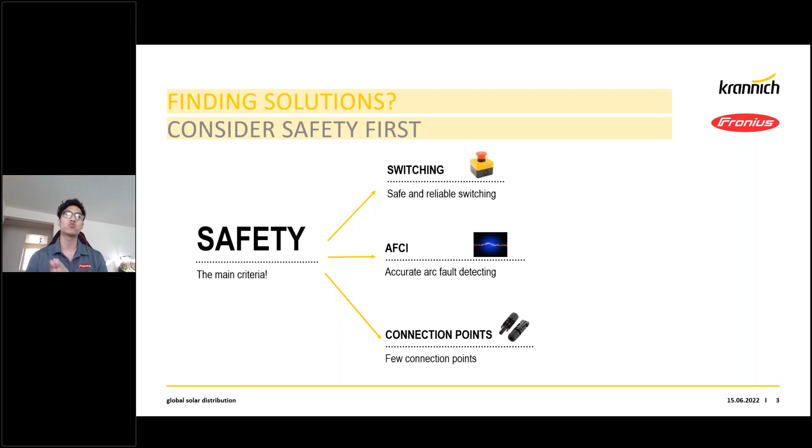So with the first criteria, we want to address safe and reliable switching, and the main reason why we want to address this is because NEC 2017 and 2014 had brought rapid shutdown to our systems. And with rapid shutdown, what we need to understand is that there's a lot of switching on and off that's occurring, right? And why do we need to take a look at this? Well, the main reason for rapid shutdown when it was implemented was in case of emergencies, a quick, efficient, and safe way to de-energize a PV rooftop, right? So why are we bringing this up?

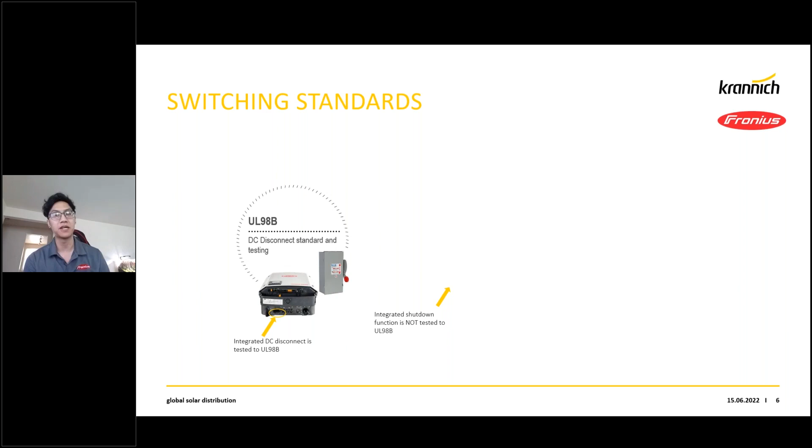Switching standards. Here at Fronius, we offer a string inverter, and all of our string inverters come standard with a DC disconnect at the bottom of it. This DC disconnect is also tested to a switching standard, the UL98B. This standard requires us to actually run that DC disconnect switch under hundreds of thousands of iterations to ensure that it functions as it should and never fails. Now, this is on our inverters that do standard DC disconnects.

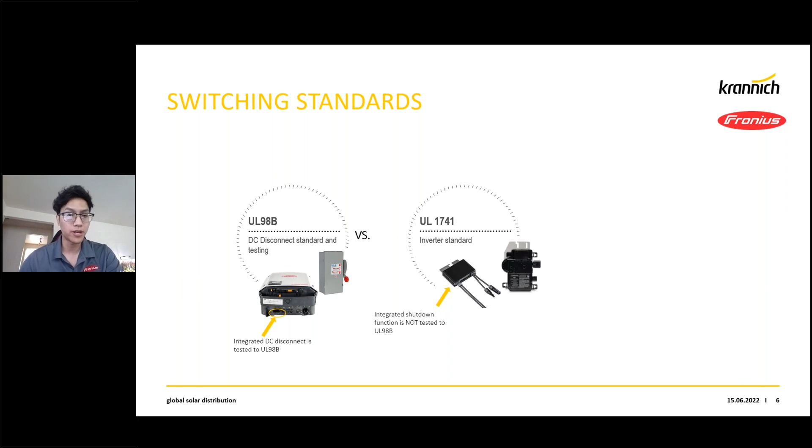However, when we start taking a look at other options within the solar market, such as module level power electronics, what we're seeing is that they're starting to do the same thing, right? In this case, module level power electronics on a rooftop is acting like a switch. However, when we actually take a look at the device that's starting to act like a switch and starting to act as a rapid shutdown device, these devices have solid state switches installed inside of them in order to do this switching. The problem with that is these switches on the module level power electronics devices are not tested to UL98B. They are not tested to these extreme conditions in which a standard DC disconnect switch would be tested in high temperatures, extreme temperatures.

So the biggest concern that we're trying to bring up here is we're starting to see within the solar market an influx of MLPE devices being installed on top of rooftops. However, they are also now being forced to be utilized as a switch for rapid shutdown. However, this rapid shutdown function is not being tested under UL 98B, so it is ultimately a large concern where we have unfair standards being put across multiple products that do similar functions. However, one product is no longer being required to UL 98B. So this is something that we often keep in mind when we're taking a look at switching. A switch that needs to function as is, but isn't being tested to standard switching requirements. It is something that we should be bringing up with our utilities and AHJs.

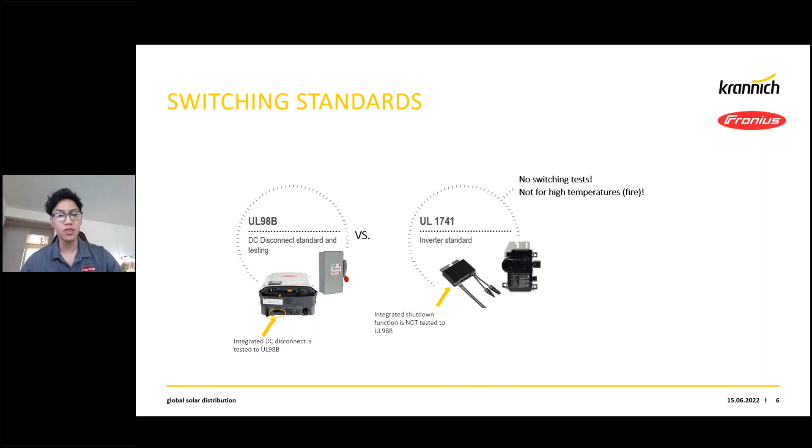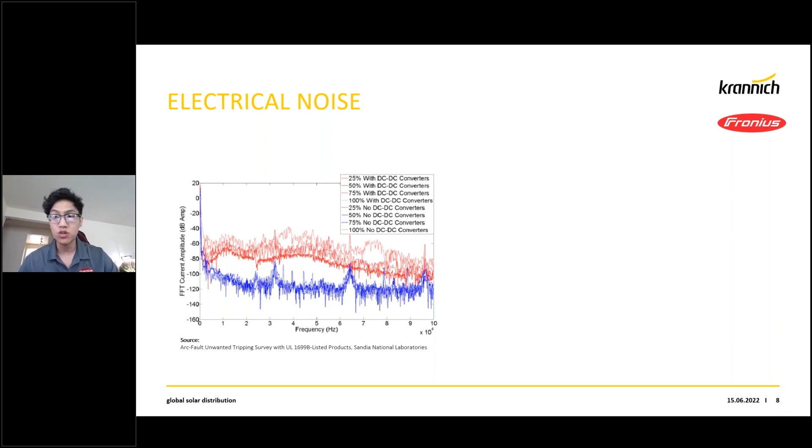But what happens when we start adding more people to either ends of this tunnel and they all start having conversations? What we're going to see is a lot of noise. It becomes a lot more difficult to have a conversation with the person you're trying to at the end of the tunnel. And the same thing occurs within our DC lines. Now, when module level power electronics is implemented onto the DC line of any PV system, what we're going to see is a lot of noise that's being introduced onto the DC line.

If you take a look at this graph, the blue line that's going across, relatively low compared to the red line, is actually your DC line coming in, minimal noise, and it's quite stable. But once you start introducing module level power electronics or DC to DC converters onto the rooftop, what we're seeing is a large shift in this signature that's coming through.

Now, what do we know about arc fault and its detection? Well, arc fault uses a bunch of algorithms and predetermined arc signatures. So if we have a predetermined arc signature and ranges within that, as we start adding module level power electronics, we start pushing this DC signal out of its standard operating ranges. And so what we can experience is, again, nuisance tripping, unreliable detection, and possibly false keep alive signals. And all of these factors add to the risk of safety within a PV system.

So whenever we take a look at options out on the market currently, we want to ensure that the inverter first and foremost has AFCI algorithms, that it's not something that you can turn off and just hide away with, because it's implemented for a reason of safety. And in order to keep it as safe as possible, we need to start thinking about this DC line and the noise that's being introduced, and if this is going to cause a lot of problems down the line of owning a PV system.

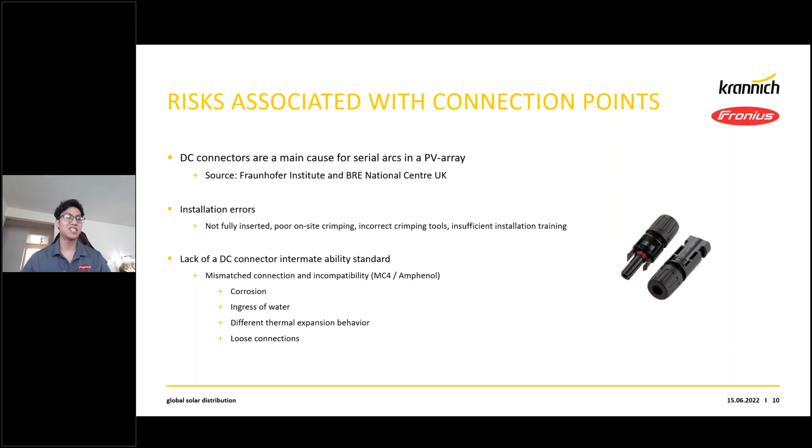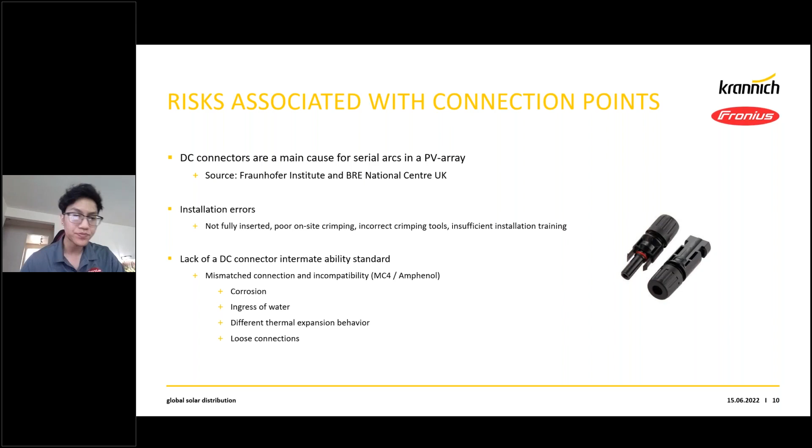Sure, you can essentially put these two parts together, but is it the best and safest? They found that every single time anyone was involved in a DC connector or a connection point in general, that this was an area for failure. So the biggest concern with the market currently is the injection of module level power electronics and the increase in number of connection points that's associated with the installation of module level power electronics.

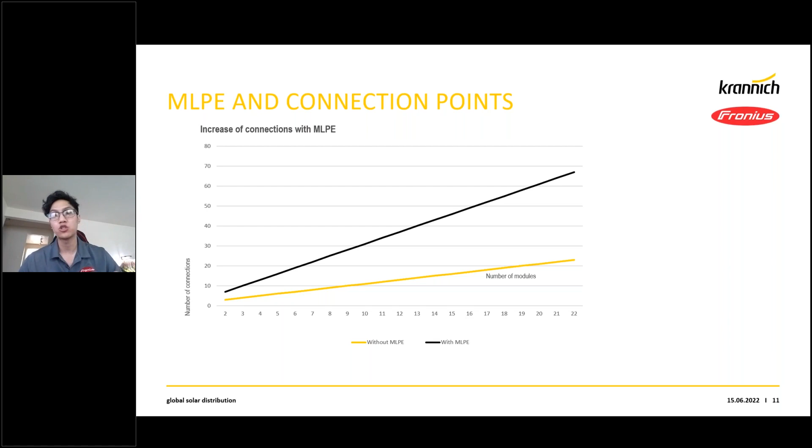This graph here shows that as we install module level power electronics, the number of connections that we introduce to a system changes by nearly a 2 to 3 fold factor. And with that being said, every one of those newly introduced connection points are now going to be an area where you have to ensure it is installed properly, and again can possibly become an area of risk for arcing.

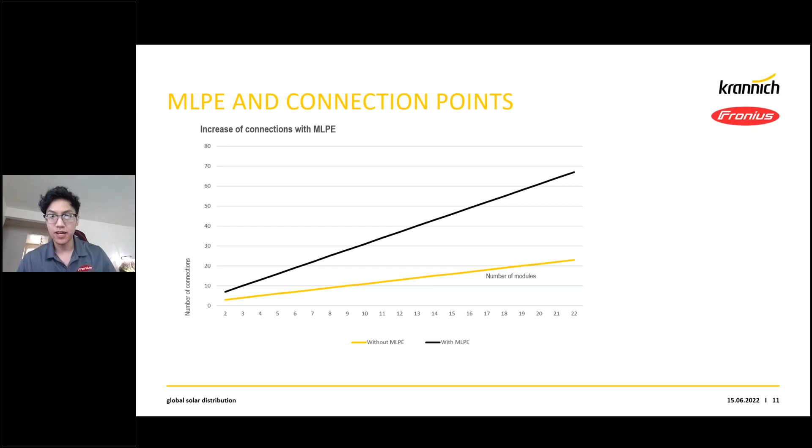All right, so hopefully the 3 different criteria, I know that they're not generally points of safety that people are concerned with, but here at Fronius, we like to take all points of safety into consideration. And one of the main things about safety that we have under our control is our products, and what can we implement into our products to ensure that our products are as safe as possible. So again, these are a few extra criteria that we wanted to take a look at today and really just

let you guys know. Again, switching, safe and reliable switching is a must-have, and we need to start questioning why module level power electronics is not being required to be tested to the same UL standard, right? UL 98B, the switching standard. Why aren't module level power electronics being tested to this?

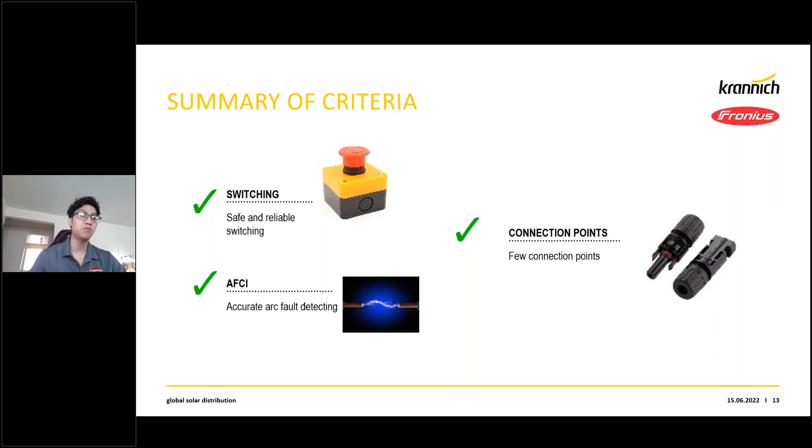AFCI, we want to make sure that they are accurate and that we don't implement any devices that cause possible problems to this. And finally, number of connection points. What we learned today was if we can reduce the number of connection points in any PV system, we can improve the longevity and the reliability of any PV system down its lifetime.

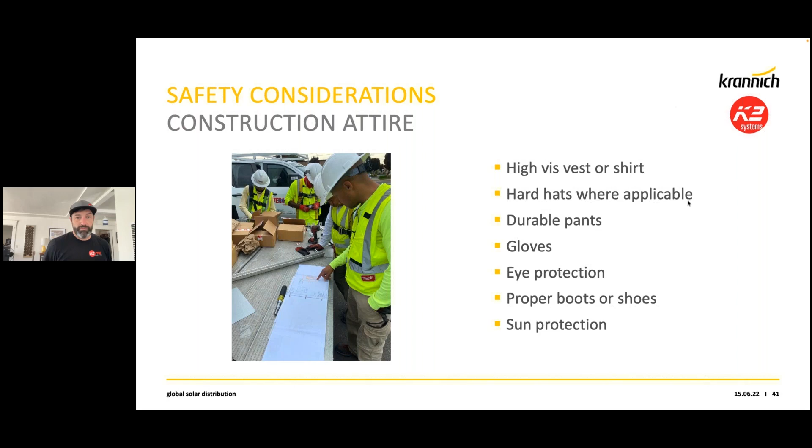So, and then you go to residential jobs and you see that some installers are not following any of this stuff. So it's good to have this. There's a good example right there, a crew I was with in Washington where they were on a government project and they had to have all these things.

A lot of installers ask about what kind of footwear. Some use skater shoes or Vans, but obviously you want to use boots, but sometimes you want to be more nimble. I found some installers are using these Cougar Paws. They're actually pretty interesting products. It's a great boot. It's flexible, it breaks in. Some of them have steel toe if you want that. And then they have this pad on the bottom that you can actually remove and replace. That is kind of like a pad that sticks really well to asphalt shingle and sometimes tile as well.

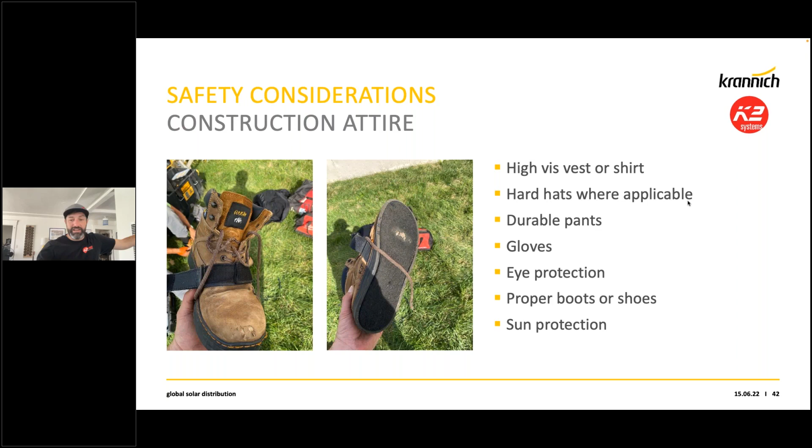And then if you're on metal roofs, obviously you want to have stickier shoes so you're not sliding around. And if there's any water or snow on the roof, you definitely want to brush that off and let it dry out, because that can just really make a metal roof really slick.

Ladder safety, this is a big one. And we're trainers, so we go to all kinds of jobs and sometimes the ladders are already set up. So I always tell our whole training crew, check out the ladder before. If you didn't set it up, definitely inspect it before you step foot or even touch that ladder at all.

So you want to make sure that you're standing, see, I don't know if you could see my camera, but if you put your feet at the feet of the ladder, you should be able to stand and hold it there so that that angle is proper. It's not overly bent over, so you're not reaching for it, and it's not a super hard slope where it's right close to your chest. You want to have a nice, perfect angle to it. So basically, if you put your feet at the feet of the ladder and reach out, and it's there comfortably like a steering wheel, then you're good to go.

And then you want 3 points of contact, but a really important thing is having the ladder be secured. A lot of times installers will take a bracket, a C-channel bracket, and a strap and strap it to the underside of the rafter on the bay underneath. You can't see, but a lot of times they do that. Or if you're doing a penetration and you're putting your fall protection, sometimes they'll put fall protection right at the ladder so that you hook in and you go up the ladder and you're safe.

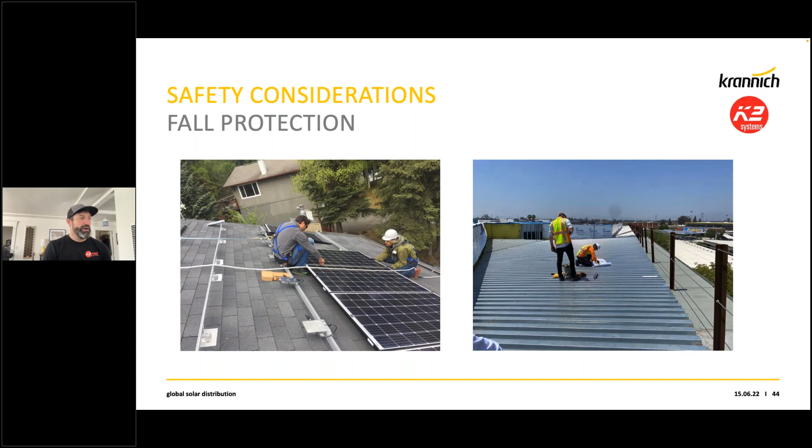They got it done, but I've seen crews use these ladder lifts that are really, really helpful. And it might take some time to set up because you have to have a little mini generator and it powers it up. But once you have that, you can have an installer on the ground prepping modules, setting them up, sending them up, and then the installers on the top can take them, install them. He can bring it back down with the control. He can bring up mounts, tools, everything, so that you don't have things falling off the roof.

And going back to this intro picture real quick, setting a perimeter is really, really important. And a lot of installers laugh at hard hats because sometimes you're on the roof, but when you're on the ground, you should be wearing a hard hat and you should set a perimeter so that homeowners or their kids are not running in that section.

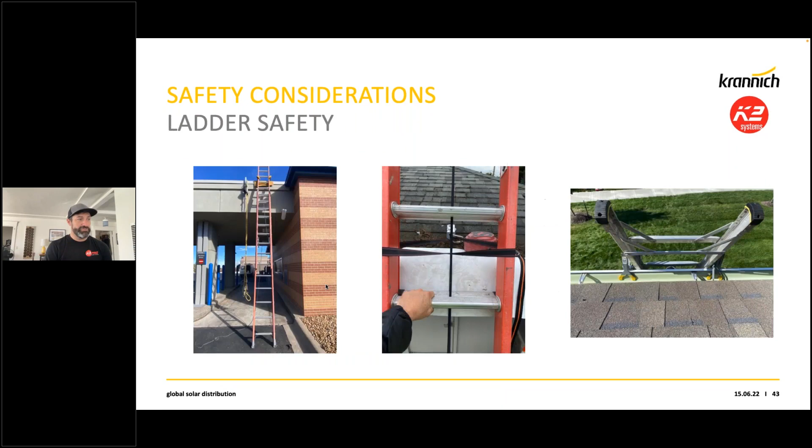That is a construction zone and nobody should be in there, so that things don't fall on them and there could be an issue. And that's where they should be wearing hard hats. So the installer below here is loading everything up, has a hard hat on actually. So this is just a brief overview of some safety things that we talk about in our new K2 Pro partnership training program that we have.

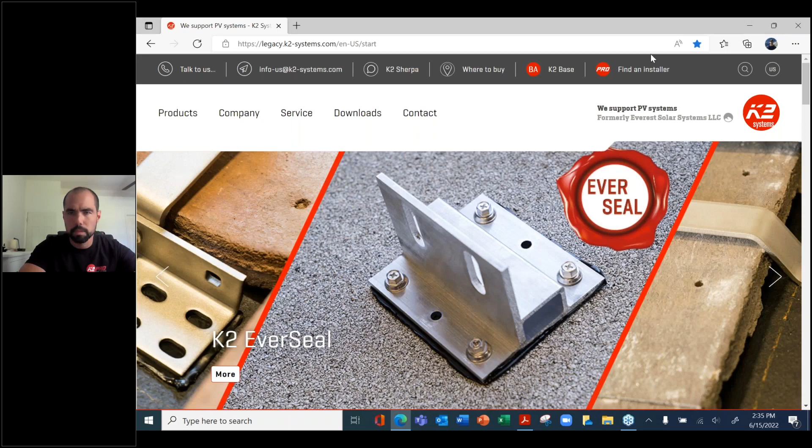So give me a second here. Okay. So let's see. Sorry, give me a second, Drew. Sorry. Pull it over to you. Yeah, all good. All right, make presenter, there you go. All right, you should have controls. It might take a minute there. Let's see, is that working now? Yeah, we can see your screen.

All right. Yeah, so I'm Drew, like Johan said in the introduction here. I'm a technical trainer for K2, come from an install background, been leading crews for 8 years before coming to K2. And just wanted to go through our solar design tool, online design tool.

So first things first, go to the homepage here, it's just k2-systems.com. And then if you look through here to service, you can find our online design tool underneath our Basecamp Education Center there. Click on that, brings you to a web page with some tips, cheat sheets, some information on how to use the tool. If you scroll down, there's also a video of Gal Roeder. He's the K2 Base product manager, giving a couple updates and improvements on the system.

So if you're at this page, you can start Base from this button here. But also, if you look at the header of our website here, there's just a quick link to get to K2 Base. All right, so now that I'm here, I'm already signed in automatically. That's me right there. So you're going to want to log in or sign up so that you can save your projects here. And when I start Base, it brings me to this dashboard with all my latest projects.

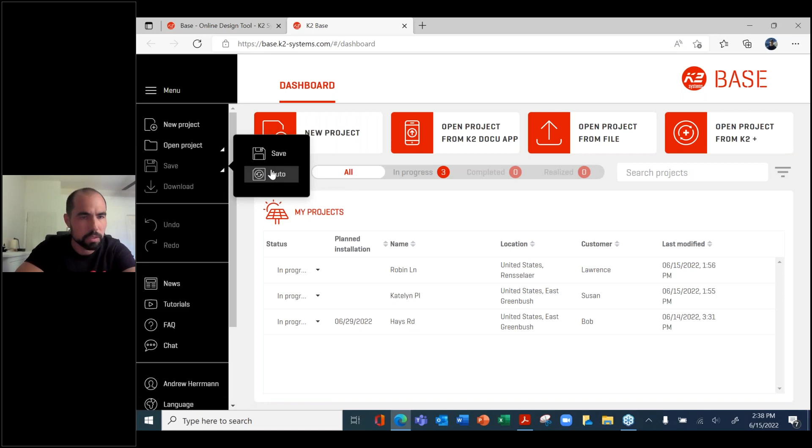You can download the project after you're completed here, or at any time really, to your computer. You have an undo, redo button, which is nice if you make any mistakes. Some news from K2, YouTube tutorials on how to use the design tool, and FAQ. And if your question isn't answered in this FAQ, you can go to our chat here, and you can use either WhatsApp or, if you have an iPhone, iMessage, to talk directly to our tech sales department, and they'll get back to you. And yeah, so let's get into it.

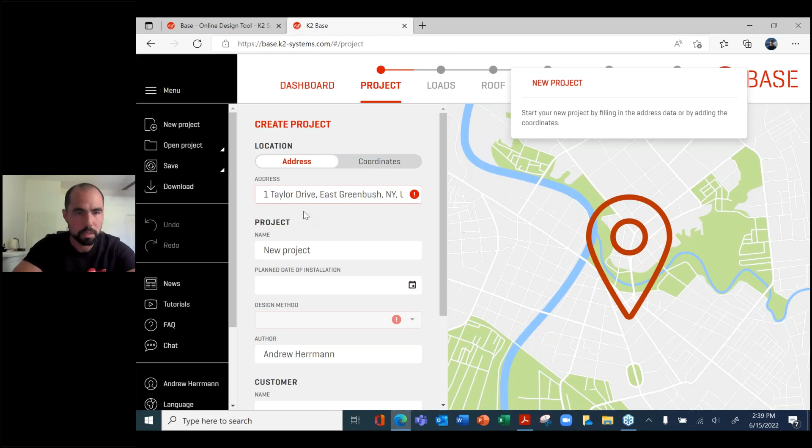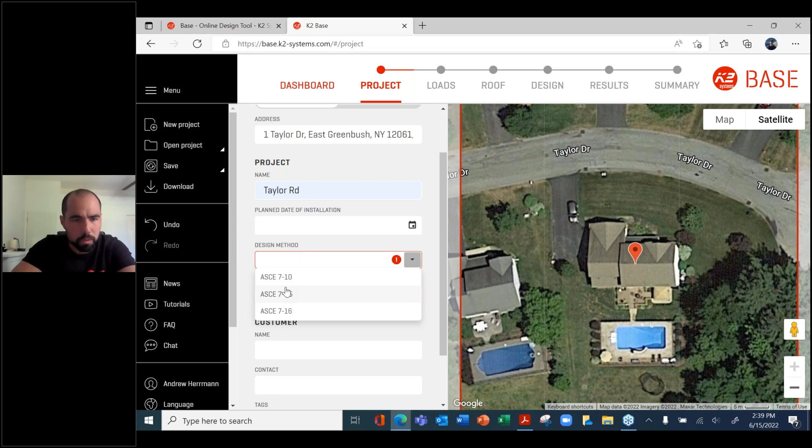Let's start a new project. I'm gonna choose something up by me here, up in the Northeast, upstate New York. All right, so there's my house. And let's name this just Taylor, yeah. You can choose a planned date of installation, but that doesn't matter for you to continue on to the other sections. The design method does matter. If your AHJ is using older minimum design loads, you can choose whatever your AHJ is using, 7-05, 7-10, or you can use the updated 7-16.

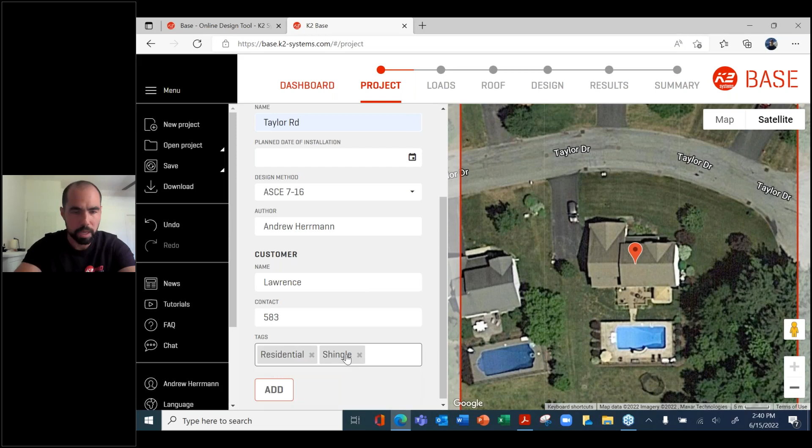Let's name this customer as Lawrence, and let's give him contact information, whatever you want to do. You can put a phone number in there. You can also tag this project with different tags, so when you're searching, you can actually pull it up by the tags. Let's say it's a shingle project, hit enter, and that'll add a new tag.

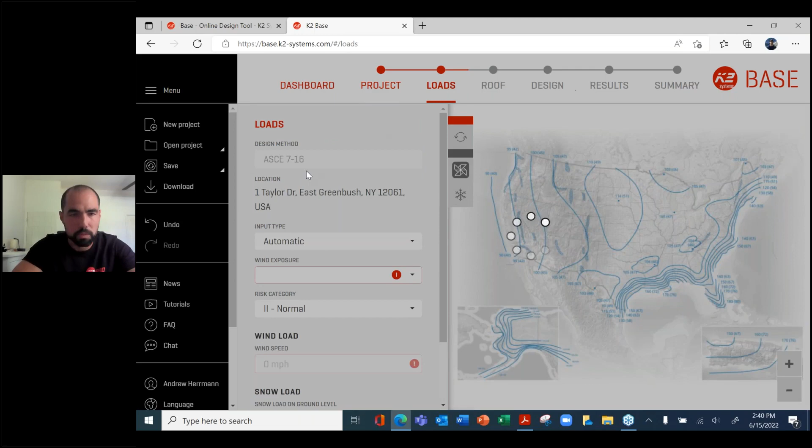So this is our new project we just added, and now we're going to go through the design requirements here. So if you choose that 7-16, it can automatically input your snow and wind loads for the region you're working in. Up in the Northeast here, we have 110 mile per hour wind, 40 PSF snow load, but you could also input that manually if you wanted to. The wind exposure is going to be urban, suburban, and risk category normal.

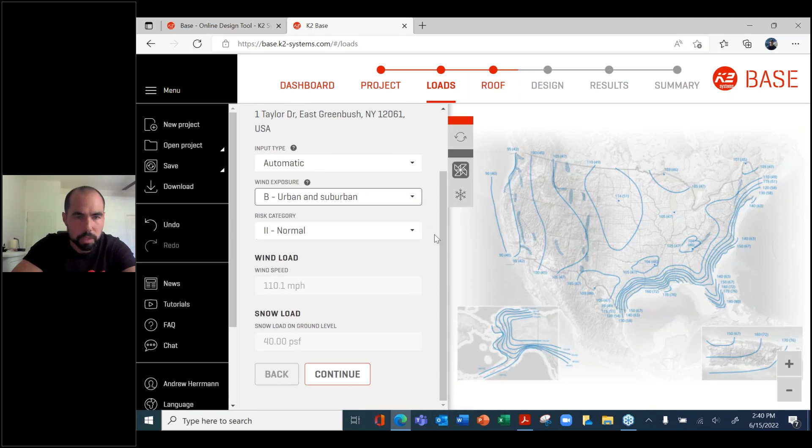I'm going to go through this pretty quick here, just so we have time for questions at the end, but also just to show you guys how easy this design tool is. So this is a gabled roof, and with that option, you have the option to draw a rectangular array. If it's a hip roof, you have a couple of different options to choose from. This is gable, we'll go rectangular.

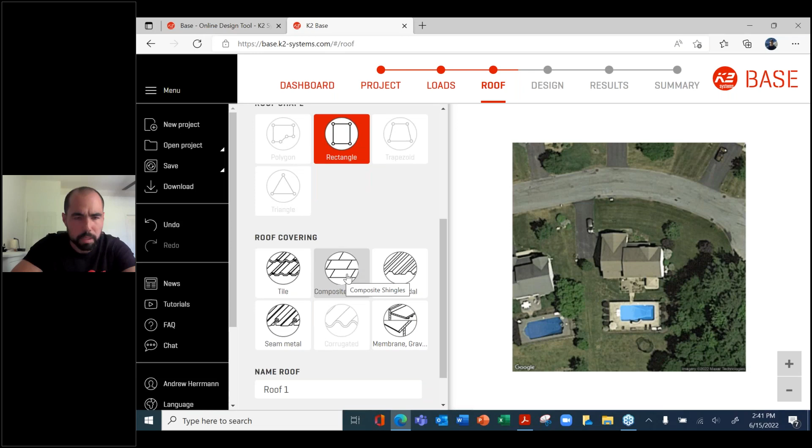It's a composite shingle roof covering, and this is important too. What's nice about this is it limits our product selection in the next sections of the design tool, so that you're not having to sift through our entire product list. And we'll just name this roof 1. So then when you click add, you will draw out the roof you want to attach your solar array.

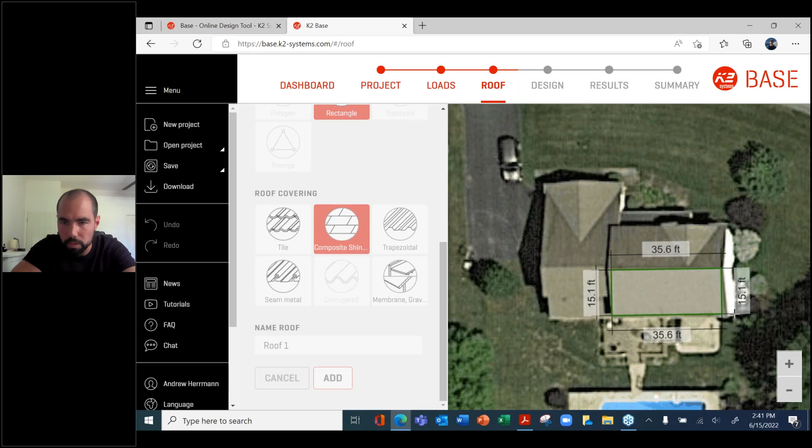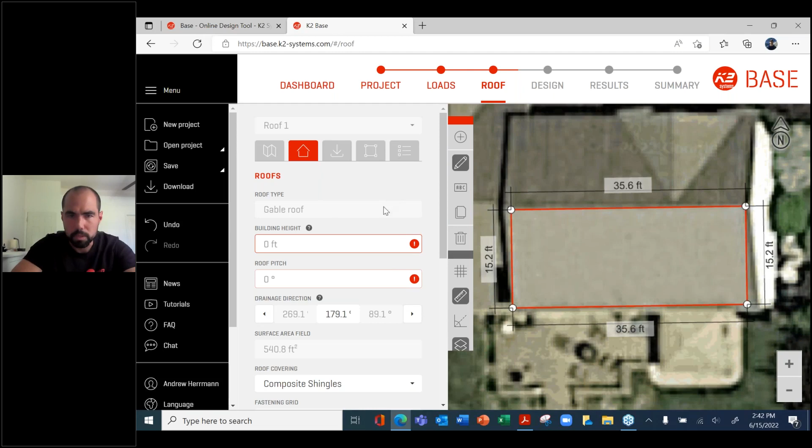So I'm just going to go from the peak here, peak to peak, and create a nice rectangle for our array. Looks like that's pretty close to the bottom of the roof. Okay, and some of this information you'll want to get from a site assessment, but we also have the option to do a street view, and you can kind of see how tall the building is and what the pitch of the roof is. But this, we'll just say it's a 2-story, so it's going to be about 25 feet. Not the biggest pitch, pretty low slope, 20 degree pitch.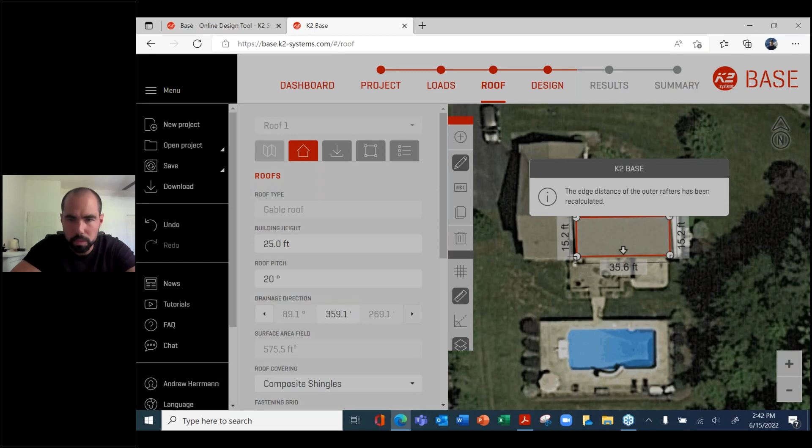Now it's saying the edge distance of our outer rafters has been recalculated depending on these parameters here. And now we'll choose our roof drainage, which is going down the roof south that way. We're using shingles. 24-inch rafter spacing. You can change this, but in this region we'll say typically a 24-inch rafter spacing.

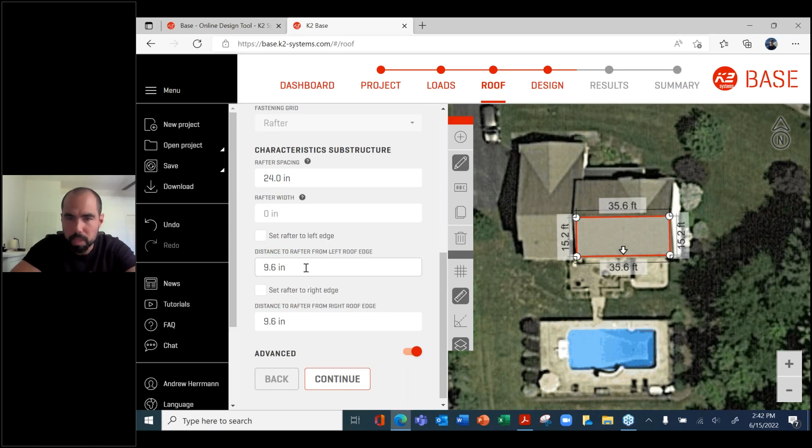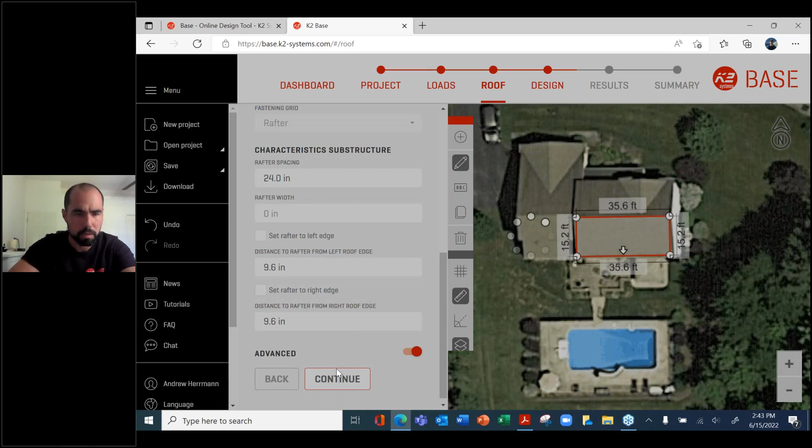And this is also part of what you wanted to do with your site assessment, kind of gauge how far in those first rafters are for your attachment zones. Just generated an automatic response here with 9. We'll just keep that for now. You can add a topographic factor if it's been approved by your engineer, your permitting engineer, if you have something in mind there, or you can just keep it automatic. This is going to be partially exposed, 26 PSF.

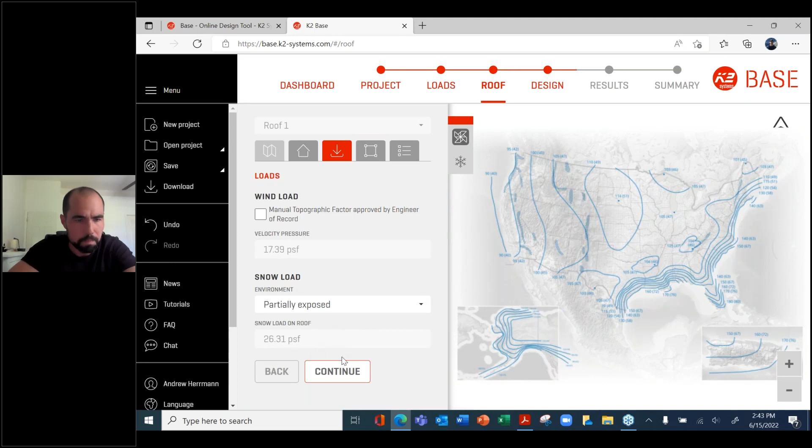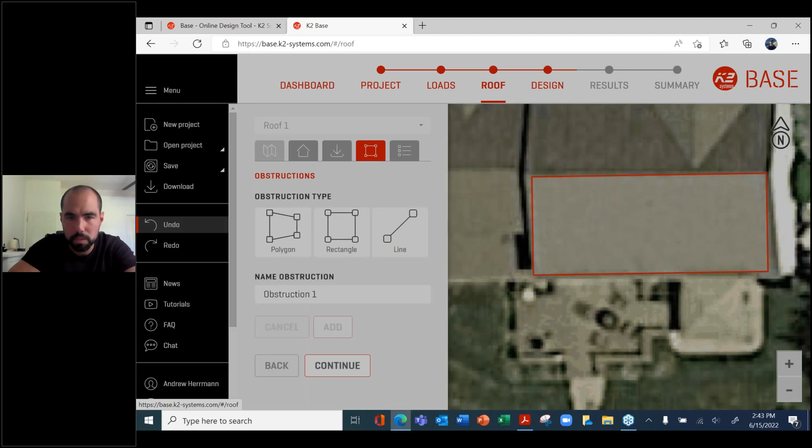If there are any roof obstructions, you can choose line, polygon, rectangular, and add a roof obstruction here, although there isn't any on here, but let's just say there was one down here. And that's how you would draw out your obstruction. You can choose the height and offset of the obstruction as well to kind of give you a gauge on the shading. But let's just undo that. Let's say there is no roof obstruction. Any notes you want to add as well?

Okay, so now we're going to choose our modules, and that's going to give us our length and width so that we can figure out how many panels we can put on this roof. You can do it user defined; we have an exhaustive list of modules, but if for some reason you can't find it on here, you can always input it manually based on the tech sheets of your modules.

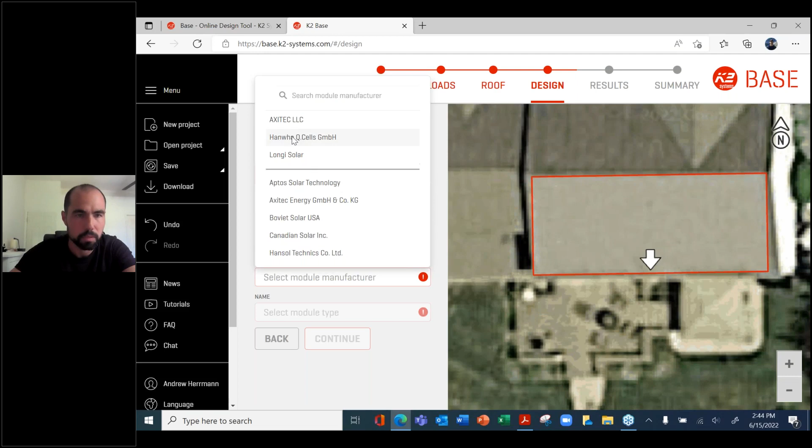Like I said, we have a really long list, so if you also want to limit that list to choose from, you can go to the UL 2703, and that'll just give you a list of modules that have been tested to UL 2703 for grounding and bonding. And it gives you the top 3 that you've been using, the last 3 modules you've been looking at, or you can choose from a list. Let's say we'll do Hanwha Q cells, and we'll do, let's just say, 350.

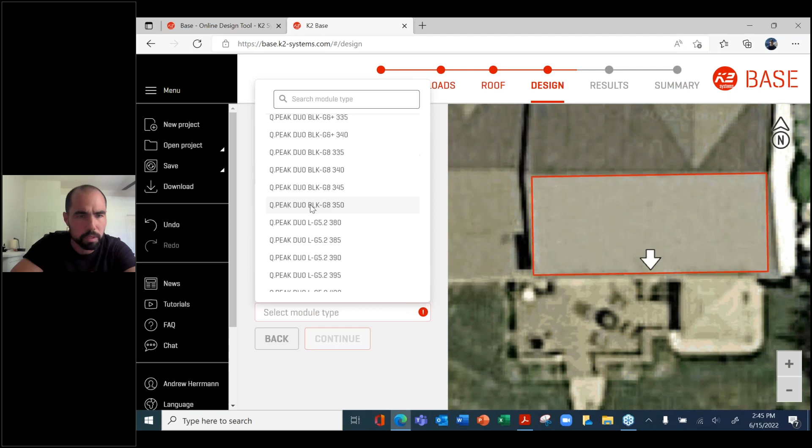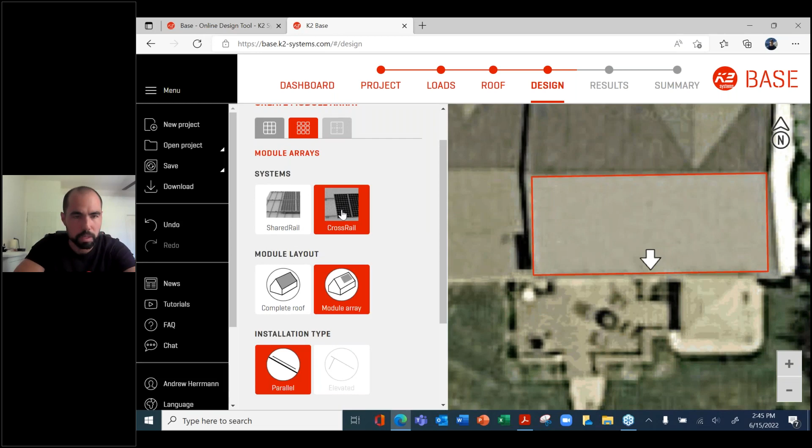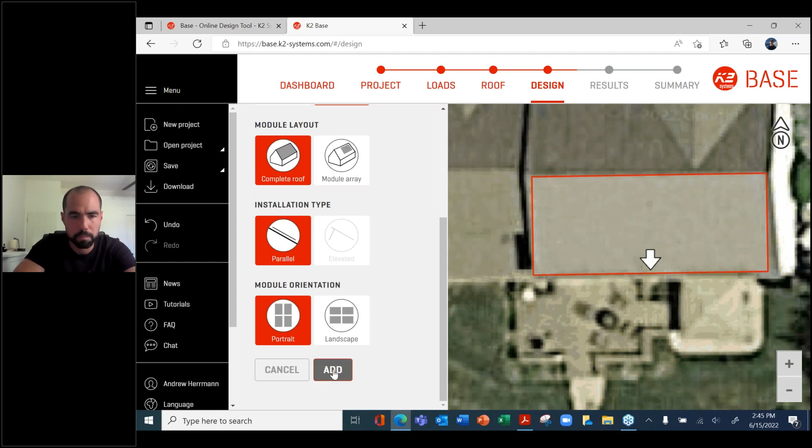Now for shingle, you have 2 options here, shared rail or cross rail. We'll just do a normal dual rail, cross rail system. And you can choose to populate the roof with as many panels as possible, or you can draw out the array. Let's just say we're going to do a complete roof here, and let's see what portrait looks like. And add. And there we go. That gives us 18 modules, 9 across here.

So you can add in a minimum roof edge distance. So if you had to get 3 feet on 3 sides, maybe, or 4 sides, you could do that. You could also do it manually with this toolbar here. You can edit the module array outline. So let's say I want to have a typical distance here of 18 inches, 1.5 feet from the ridge cap, and then let's do 3 feet on either side here.

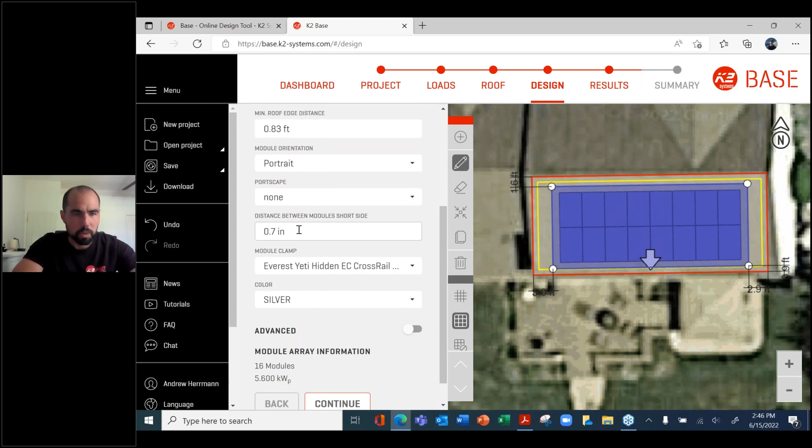And you can see those numbers changing down at the bottom or at the top. That's close enough. There we go. This is your distance between modules, accounting for our mid clamps. You could choose to do something in portscape as well. If you had some obstructions, you can do bottom row, top row, and landscape. It gives you a new array.

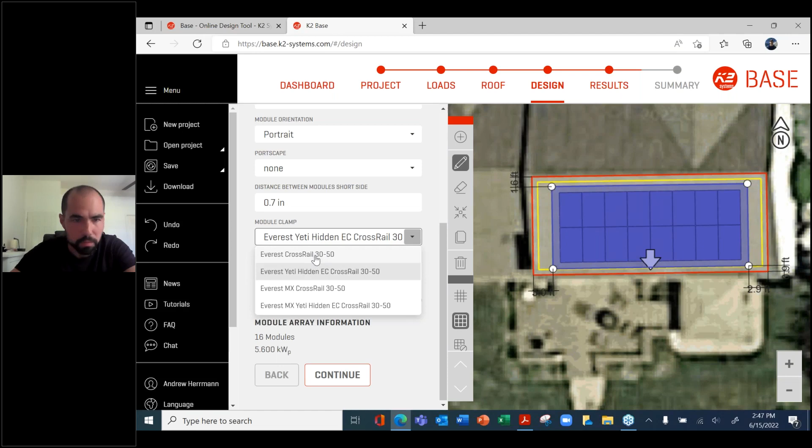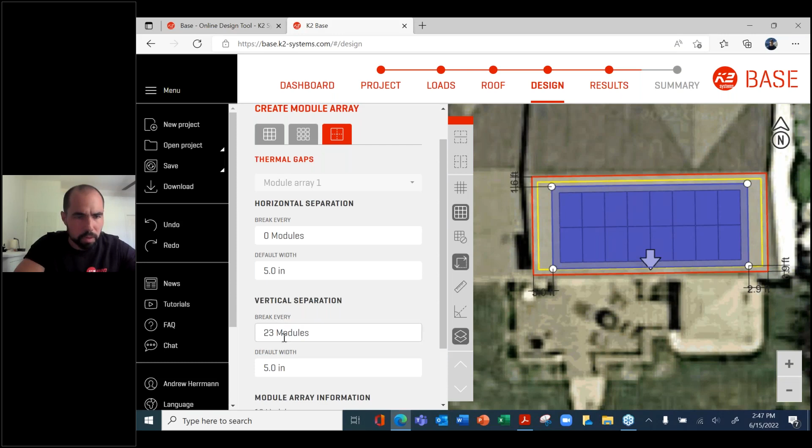And choose your end clamp. So that'll account for your rail cantilever, your extra rail that you're going to hang outside of the array if you're using our standard end clamp, but let's just use the Yeti hidden end clamp. On this array, since it's so small, we don't need any separation, but this is accounting for your thermal gaps here for expansion and contraction, vertically and horizontally.

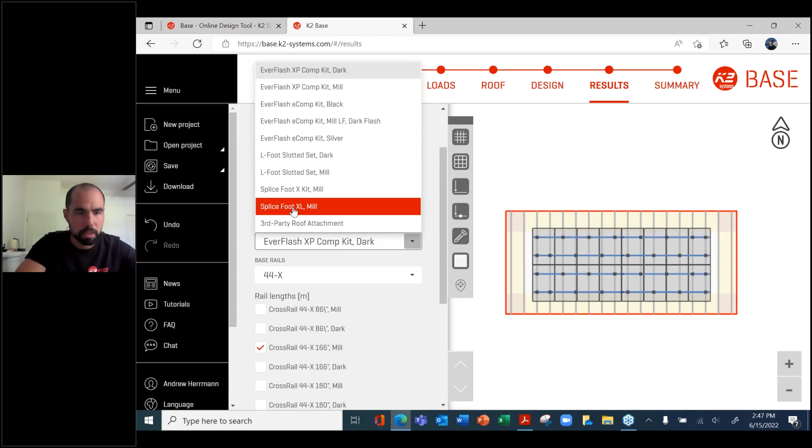And there we go, saying everything looks in order, and it actually gives you the rafters, the roof attachments, your rail, everything right here. And this is where we're going to choose the mounts we want to use in the racking system. So let's go with the splice foot. And with that option, you have a deck attached or a rafter attached option. We'll stick with rafter since we're in the Northeast here. And I want to use Crossrail 44X dark.

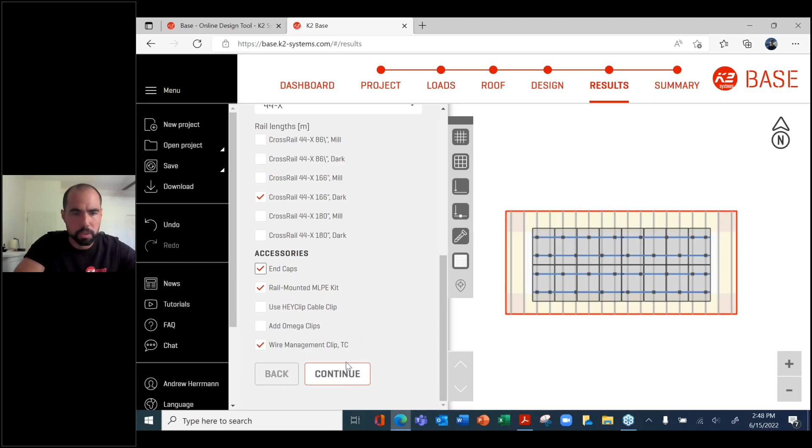Let's say it's an Enphase system here, so we don't want to use any omega clips, any HEYClips. We can go straight into our rail channel with the wires and just use the top channel clip. Let's throw some end caps on there, and this will all get populated into your BOM. So it's important to choose your accessories you want. Everything looks good. Continue.

Gives you some cantilever tension, length looks okay, it says. Your fastener utilization, and brings us to our summary. So it gives you a bill of materials here, pricing, and then if you had different roofs, you could pick the different roof covering.

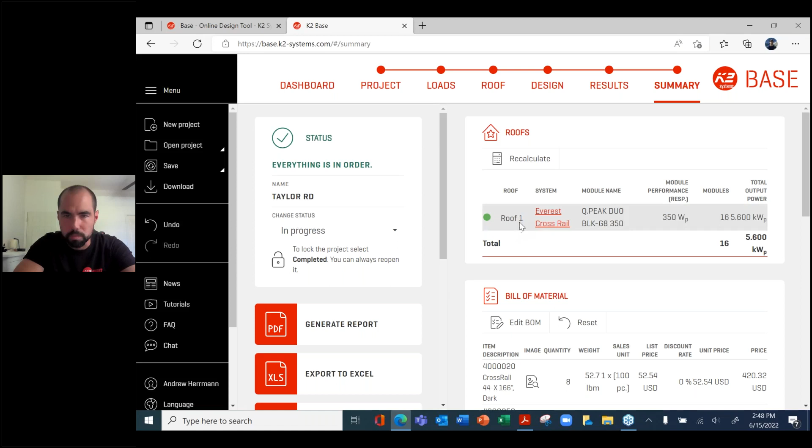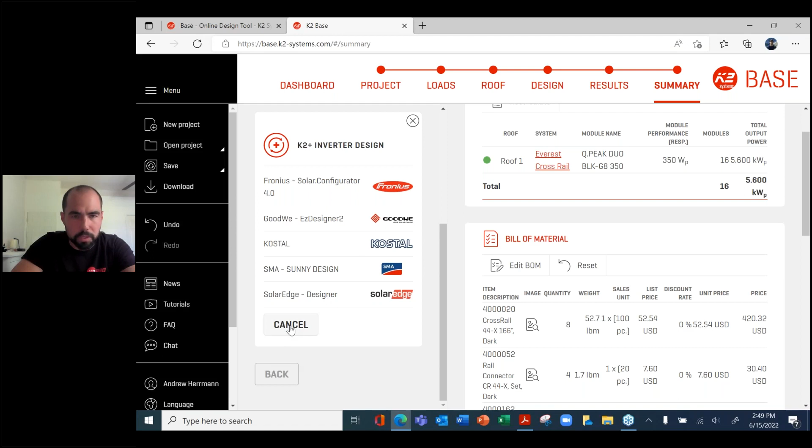Over here on the left sidebar, you have some options. You can export to GreenLancer if you have an account with them, and they can give you some rapid permitting, some pricing on some structural engineering, K2 design software. This is that API bridge we were talking about with different companies here. We have Fronius, so you can link to there and get into your string inverter sizing and designing. You could also export to CAD and a DXF, DWG file.

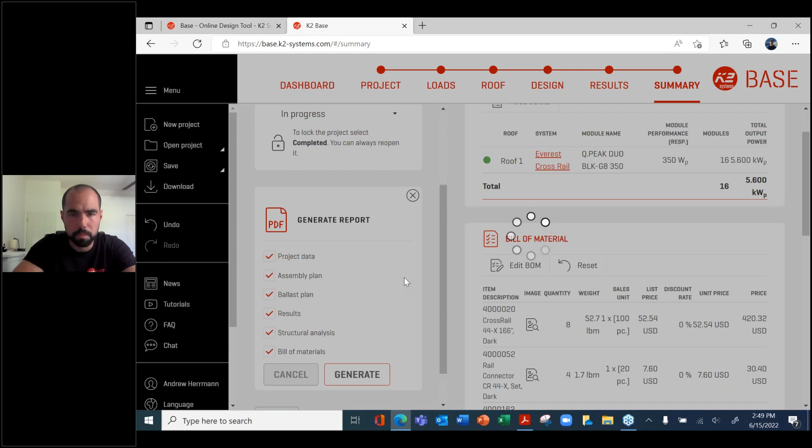And then what we want to do is generate a PDF report. Gives you the project data, bill of materials, all this type of structural analysis. And if we generate that report, it should pop up. We can open this file, and there we go.

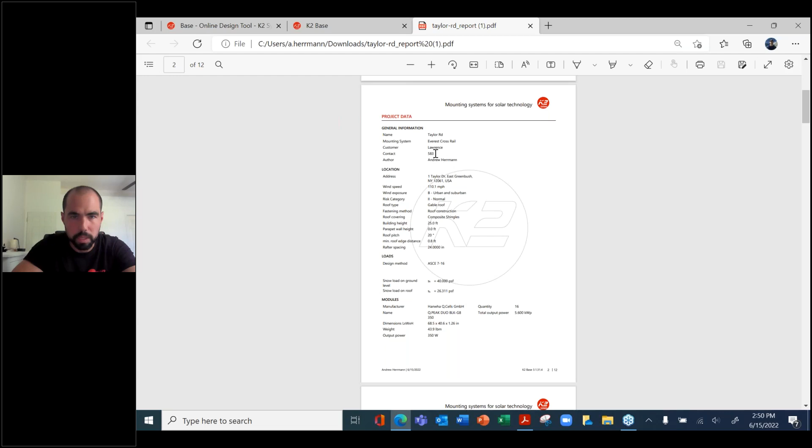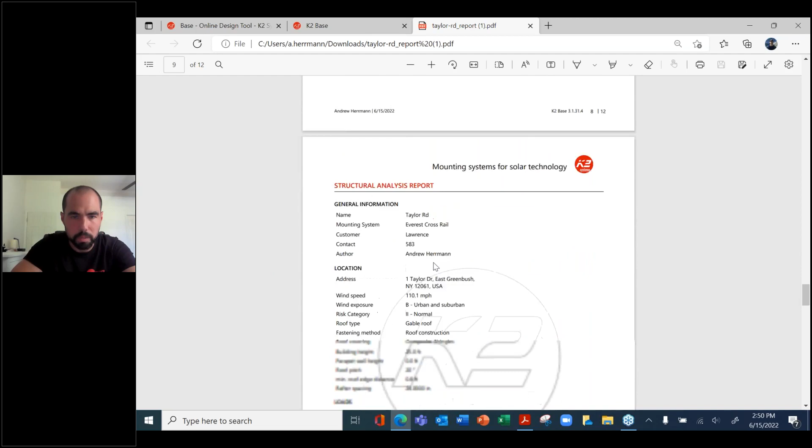And this will give you some information on your project, the panels we're using, the job site, some engineering. I don't know if this is too zoomed out for you guys to see. There we go. And then, yep, your roof attachments, rail, and some more engineering. And then at the bottom here, you have your bill of materials.

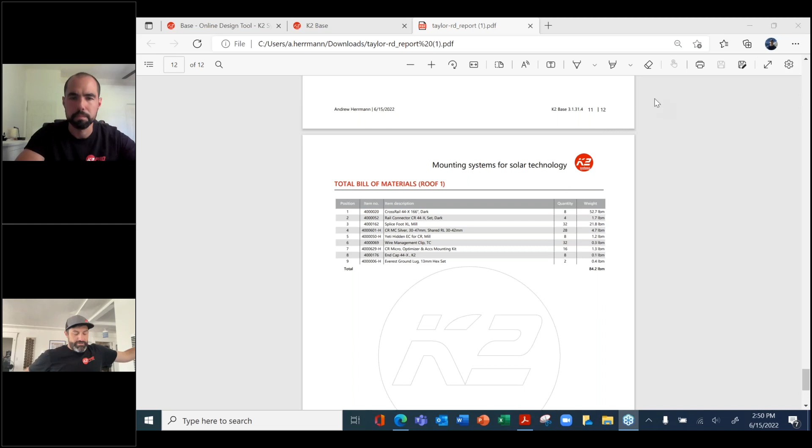Yeah, and Drew, I just wanted to add that this is a good tool if you're trying to design systems for ASCE 7-16. There's a lot of new requirements, and there's new roof zones and wind speeds now that are very specific to solar, and they've gotten more defined. There used to be only 2 roof zones, and now there's, I believe, 6. And there's interior. What's that? You can see that in the report here. Yeah, my screen is still sharing. You have the yellow, red corners. Yeah, exactly. So this is all built in with our engineering.

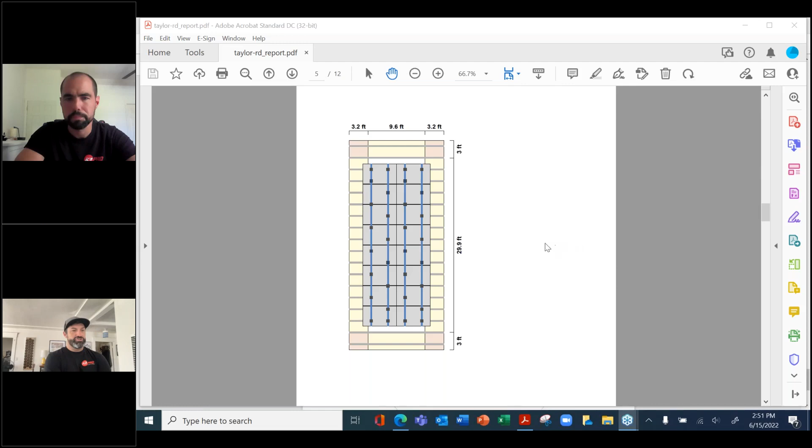So if you're wondering what's the best mount to install, because we have deck attached mounts, we have rafter attached mounts, and if you want to see the different spans in your areas, you can do that by switching the mounting systems in this tool. And then for distributors, it's really good to know what the installers are designing, what they're using, having a BOM. Then it has all the part numbers and they can go through it. So it's a really helpful tool.

And having those bridges between all the inverter manufacturers, as you showed, you can even use the Fronius one there. So it's really handy. So I highly recommend getting up to speed on how that design tool works, especially if you're the one designing your systems and then sharing it with your rep at Krannich and any of the Krannich reps if they want to learn it as well.

It's very handy. And then we offer support to double check the BOMs to see that it's done right and if there's anything missing or maybe things to look for. And then obviously you want to throw in some extra materials as well as you would on any project. So just wanted to add that.